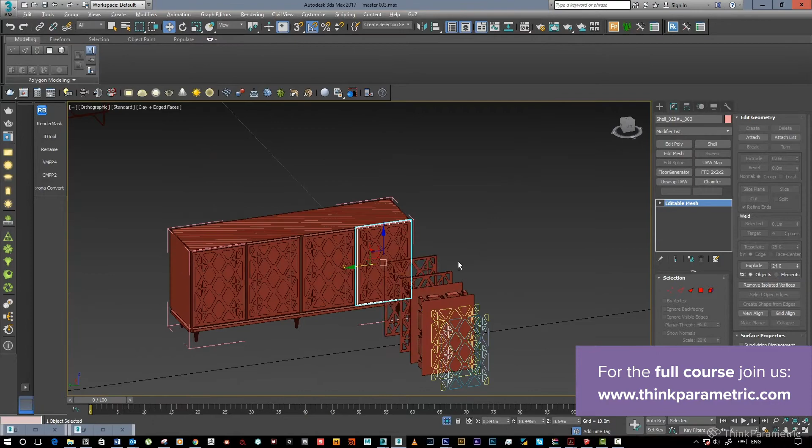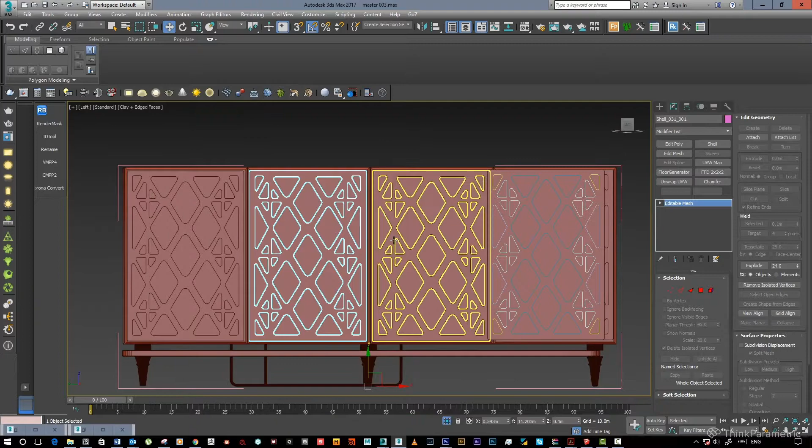Hi guys, so we're going to be giving quick tips for the modeling of the drawer we have in the scene. I already did the remodeling of this main part, which I think is the most important detail regarding this drawer. Taking a look at the front face of the drawer, we have this metal plate. In order to understand how to model things, you need to understand how to break them into forms, into shapes. We can see basically here that we have a few triangles and rhomboids.

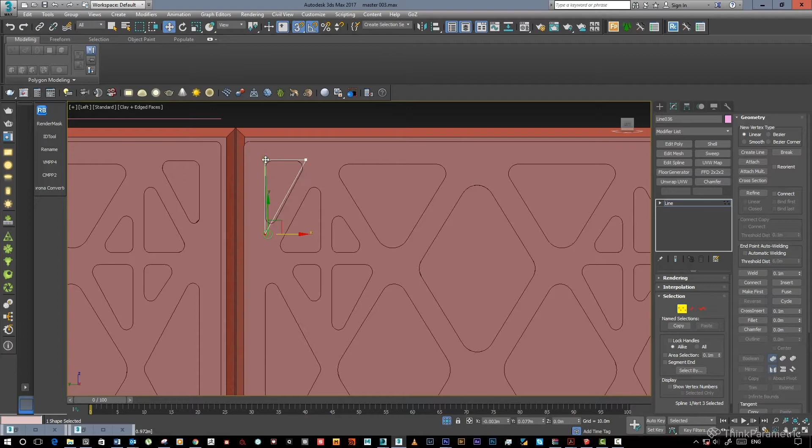So what I did is just took a shape, like this, duplicated it, mirrored that, and put it in here. And in all four corners, I did the same for every single one of these.

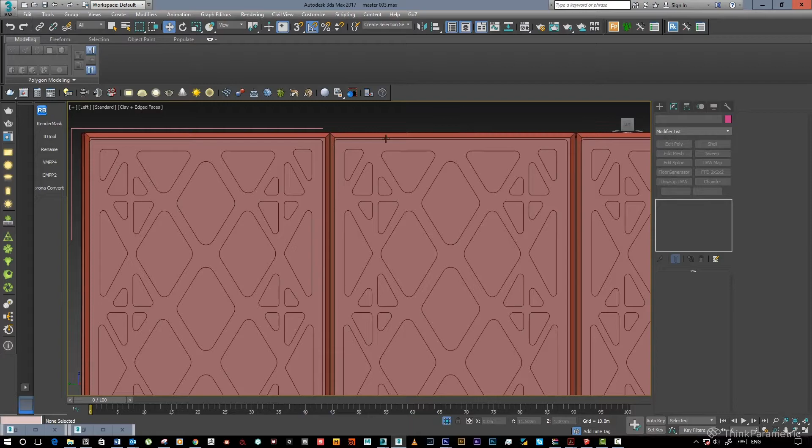Since there are pretty much shapes that are repeating themselves, such as this one, we have repetitions here and all over the place, as well as the corners, the sides, this one, and in the center we have 1, 2, 3, 4 shapes that repeat, and a few others, here and all over the place.

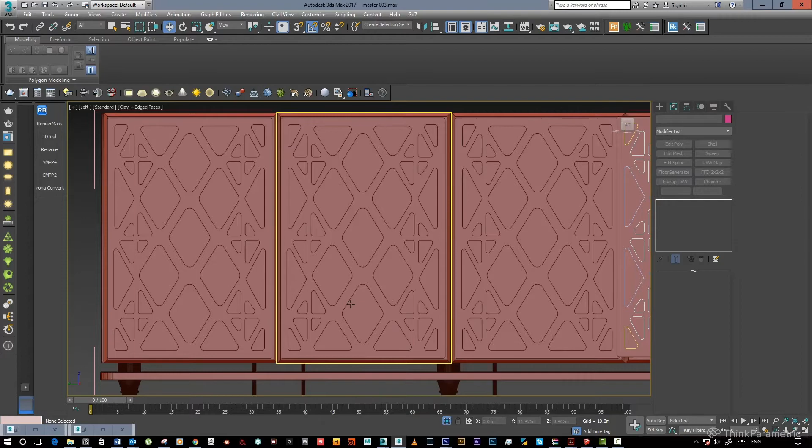So what I did, as I mentioned, is basically model these ones. After that, I created those other shapes, these ones in the center, and after that, the last ones in here.

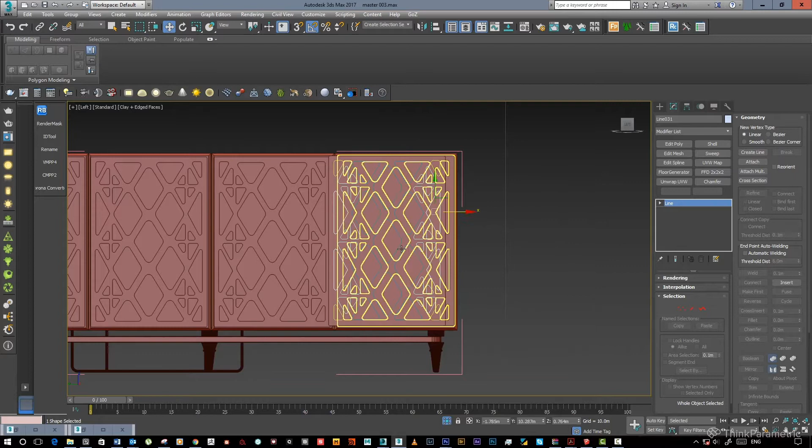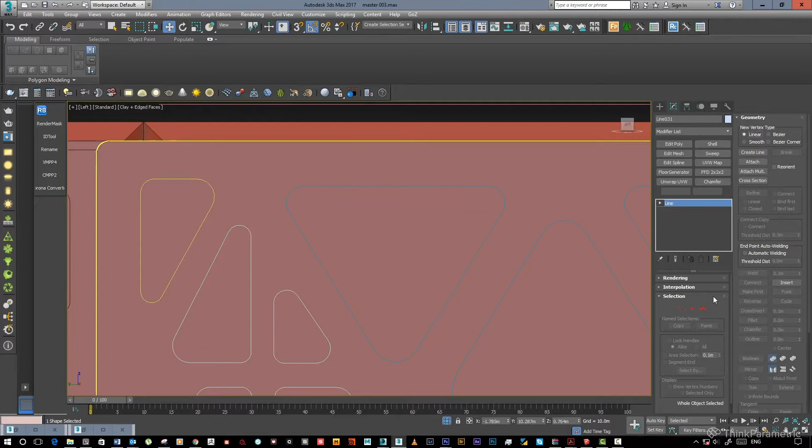Now you can see that they are filleted. So basically what I did is I filleted each of these separately. First, for example, the lower corners, then these upper corners. And since the radius is not the same from this one to this one, I basically fillet them in groups. For example, these top corners, and I fillet them.

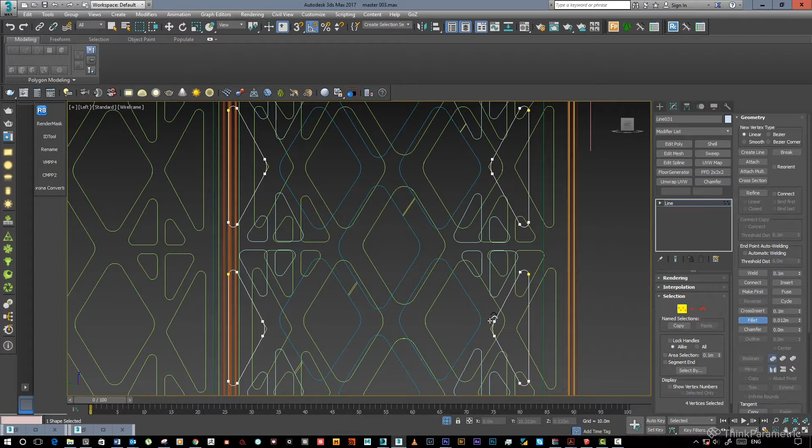And actually, if you can see, I'm still missing this corner. So selected in groups, and after that I started filleting them like this. This chamfer is quite small. Just like this. And now we have already that shape.

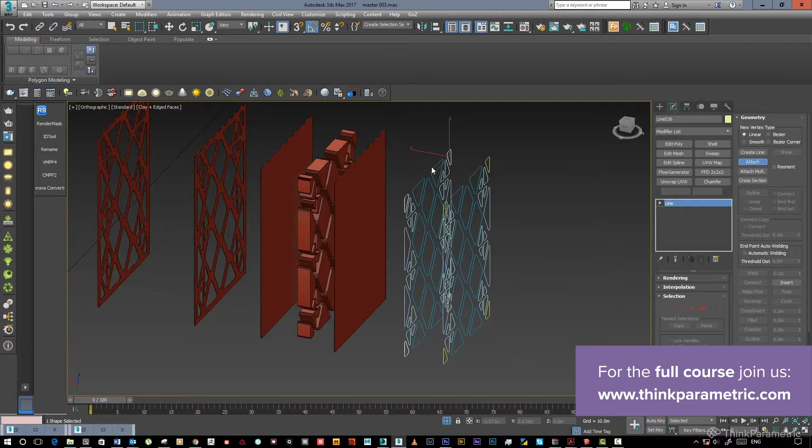So after that, since this one is wrong, I will duplicate this and remake the whole process. After that, I attach the whole line together. After this, we extrude it.

And it would be this step. The thickness of this plate is about 2 millimeters, or even 3. So after we have the plate and this shape, we can make a boolean out of it.

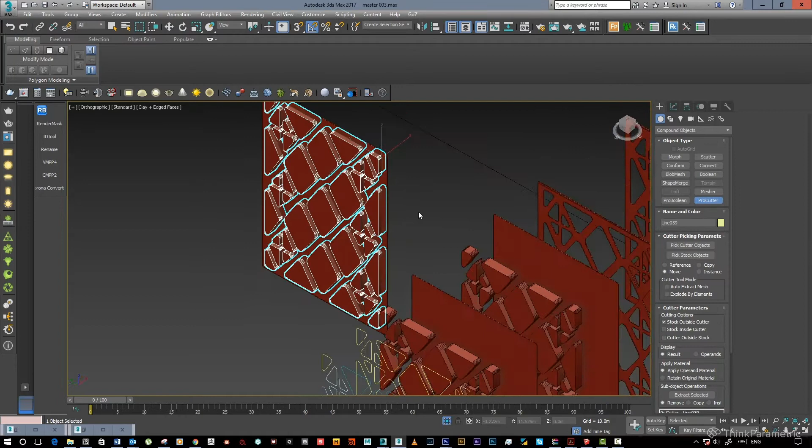So we're going to be making a boolean. We need to make it intersect. Just like that is perfect. So from here, compound objects, ProCutter, and we already have this one selected. So we pick stock objects, and there you go, we have our shape.

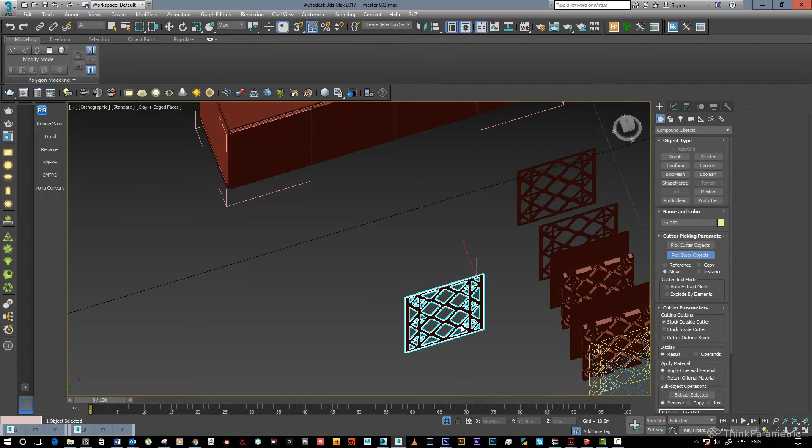Let's say if we have no references now, we don't have anymore the reference of that furniture in real life, but the client pretty much creates this kind of furniture that is pretty much the same. So we have a metal plate that is pretty much satin, kind of glossy, 75%, or maybe 65%.

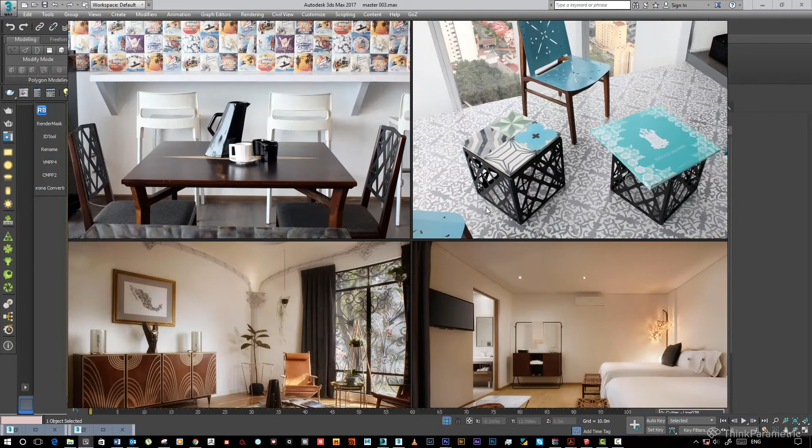Of course, every single metal in real life is chamfered. Here, for example, you can see there is a really small chamfer over there, kind of like 1 millimeter. But what happens in this kind of boolean objects,

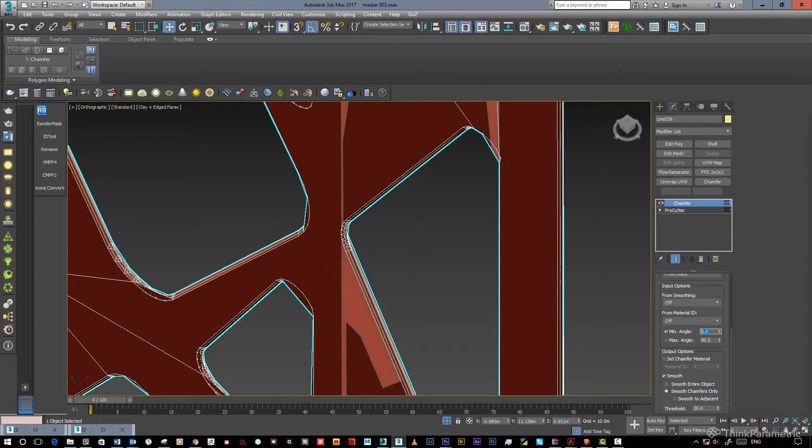So one of the ideas I have is to make those chamfers in the material. And what do I mean by making these chamfers in the material?

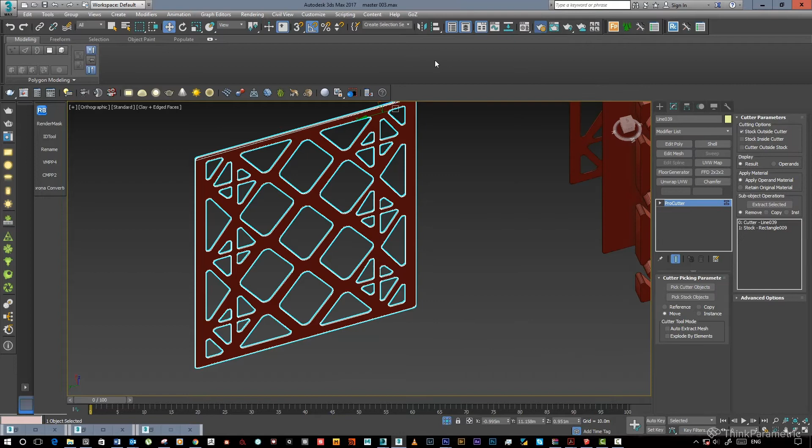First of all, let's change this one to Corona. Okay, here in materials, we go to Corona, materials, general, Corona material. Okay, we got Corona material in here. In the maps, if we go to bump, we can see that we have a Corona edge material, Corona round edges. So in here we just specify something like 0.001, and that would be it in order to see if we have our edges in here.

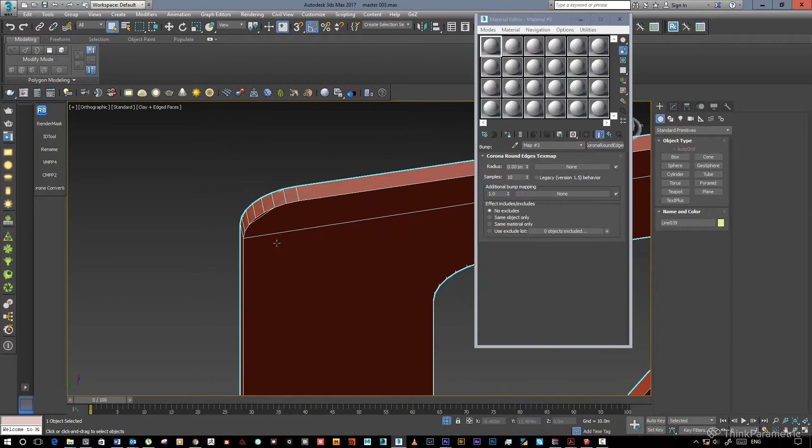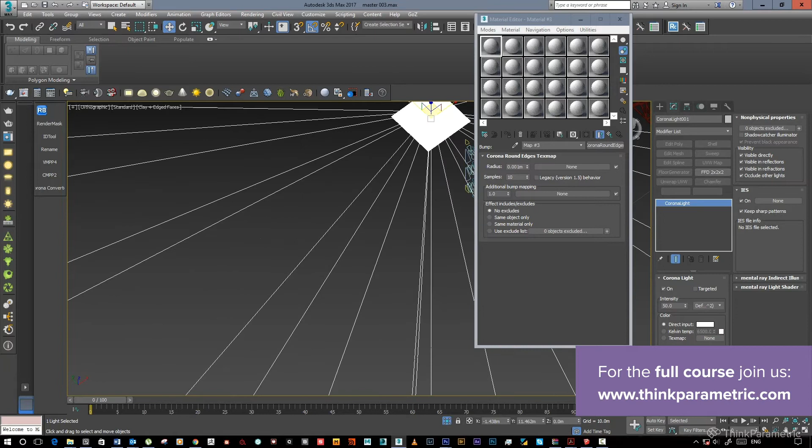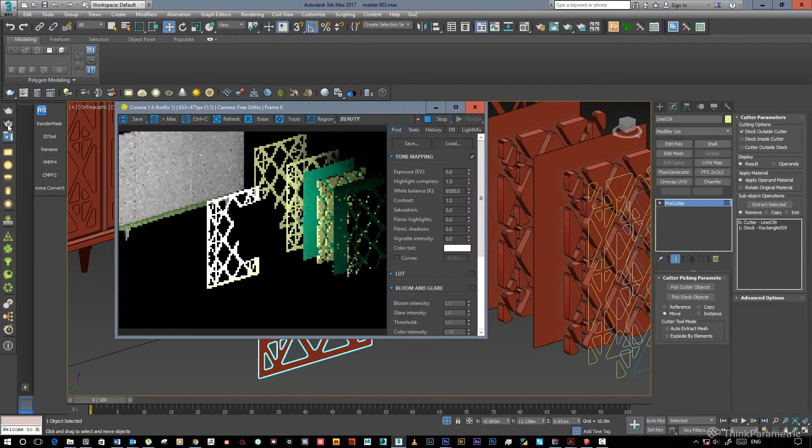The thing that you must have in your scene, let's just give it a try, a really quick try. So here we have Corona light. Sphere, rectangle. Okay, so just for the sake of trying it, okay. Directly just like that, I think we won't be able to see it. So

Yep, we have it. If you can see it, we have a chamfer there. I don't think we can go any lower. Yeah, we have a chamfer in there. And if you want to check that out, we can take it off. There you go. We have a chamfer in there.

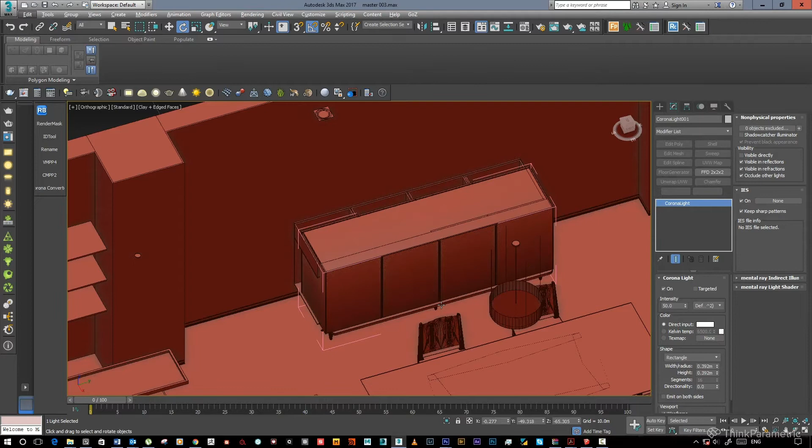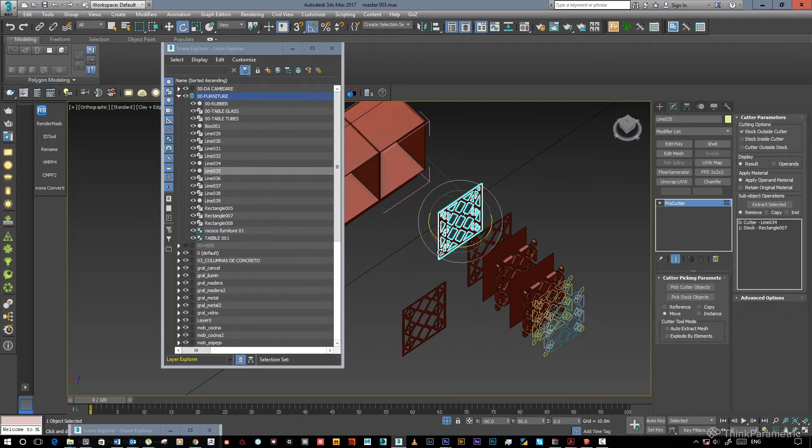To resolve that, we could do it with the chamfer modifier activated, or with the material. I think with the material is quite simple, because that way we can apply it to many other objects without adding more polygons to our geometry. So okay, once we already have this guy here that we need from the front plate, we just put it... show you.

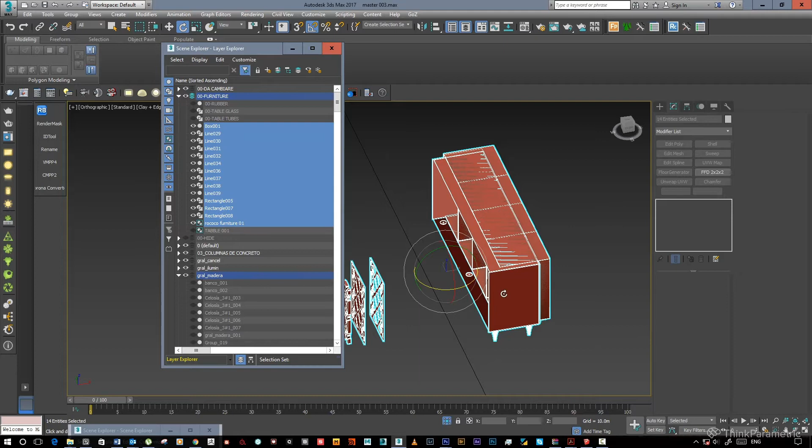So we have in here, okay, so yeah, sorry about that. So we have in here, if we open that, from here we just duplicate this geometry that is already working fine since the vertices are welded. So in this one we can just chamfer, make it 0.1. Since it's a soft material such as wood, I would use a 0.55 tension and smooth chamfers only. Remember about this option. And yeah, one more thing.

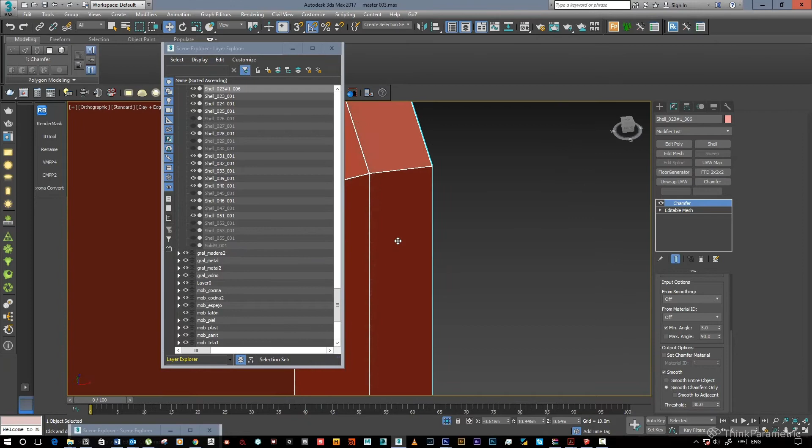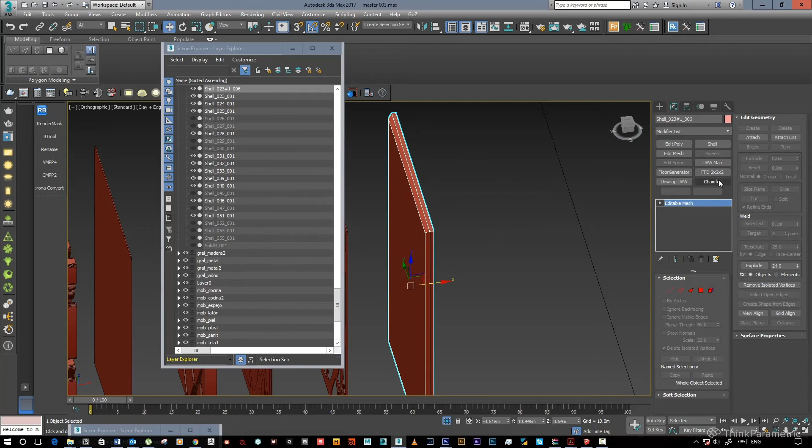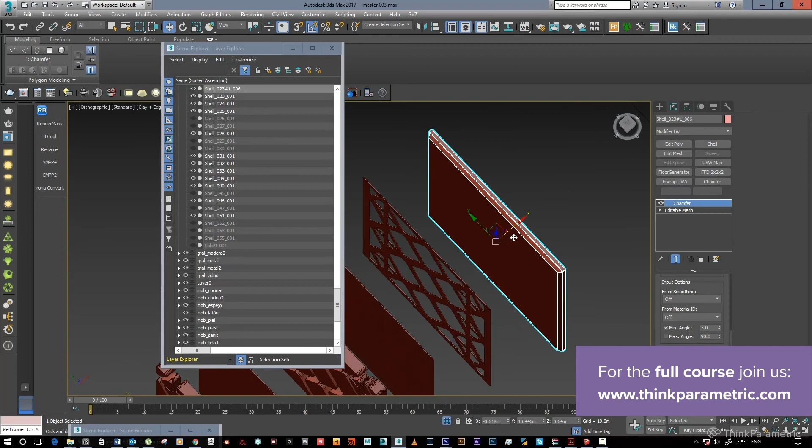Since as always SketchUp imports with really a lot of problems, what I do is reset XForm. To this one we need to detach it. Now we reset the XForm, we collapse all. Okay, and now if we apply the chamfer, it works better. So 0.001, that way you can see if it works better. 0.55 tension and smooth chamfers only. That way, if you can see here, maybe not now, but in many other objects, there are times in which it has a few problems.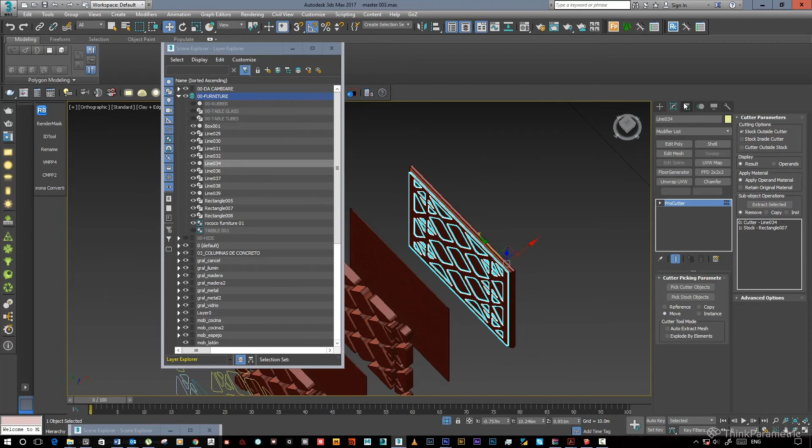So now we need to put it just attached to the door. Now, of course, we just center the pivot, and that's it. We have one door. These references, basically, we don't have anything to make the door rotate. So here, basically, it's just like that, plain without anything else inside. I think that this way, the object is already done, and the rest of the geometry is quite easy to model. This element doesn't come in the model that the client gave us, so we'll need to remodel that.

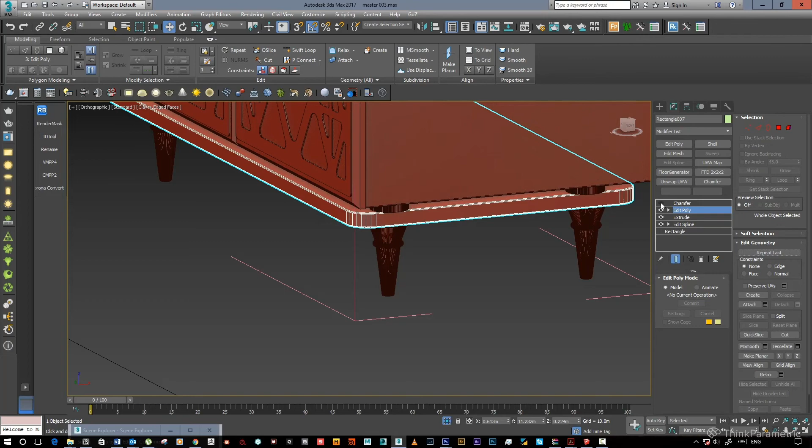And this is basically 1, 2, 3 cylinders, and this one was a spline. I rounded the edges, filleted the edges, and I extruded. After that, I converted into poly in order to grab the vertices and move them down, and after that I just applied another chamfer, and that would be it for the lower part of this drawer. The rest is pretty easy to do. This is just a box that I modeled, and I put some divisions in there. We're not gonna see them, but just in case, I did that.

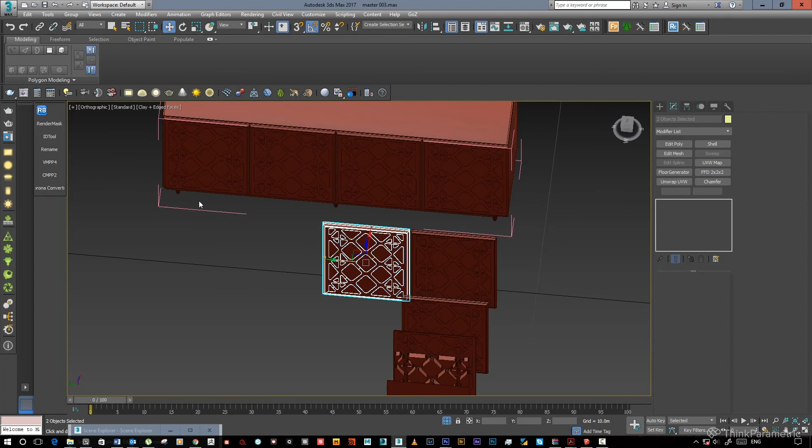With this door model, we just need to duplicate it, or even instance it, 4 different times, and that would be it. I hope these quick tips can help you to understand how to break different objects into different shapes and try to model them this way.